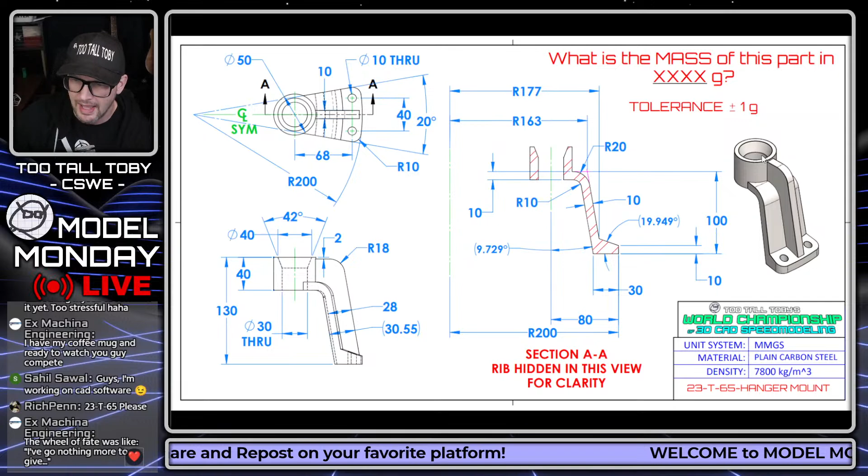I think I'm going to start out by doing - Rich Penn is saying do 65 please, the hanger mount. Sure yeah Rich, that's a great suggestion, I can definitely do the hanger mount. And I think I'm going to also do this one here, the puller body.

I thought this one was really interesting. It was a real neat moment watching the two runners. They both kind of got stuck with the same hang up on this model. So I'm definitely going to do this one.

Rich Penn is asking for 65. I can definitely do 65 as well. That's this one here, the hanger mount. So if you guys have any other ones you'd like to see, let me know and I'll try to model them up. But I think those are two excellent candidates, 65 and 71. Can definitely try to do those.

Brace plate is a good one to learn from. Yeah, you have to be clever with your reference geometry. Very nice insight there, Aaron.

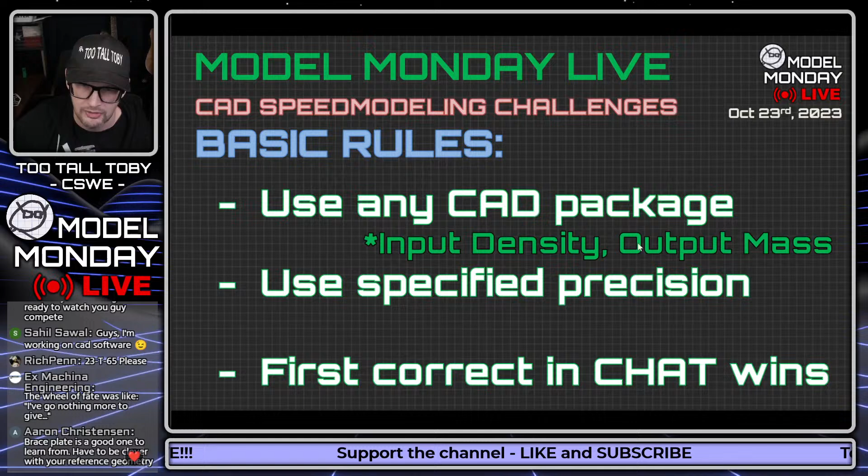Looks like it's off here. So we're going to go from 2D to 3D. I'm going to show you guys a 2D print. You're going to turn it into a 3D model, and you're going to enter the mass of that model in the YouTube chat. The basic rules are that you can use any CAD package. You want to make sure you use the specified precision, especially if the model is in pounds. It's usually in x.xx or x.xxx pounds. Make sure you use the correct precision. And the first one to answer correct in the chat will be declared the winner.

These are the units and materials that we use for Model Monday Live. So if you are here for the first time, make sure you take a screen capture of these units. Make sure you take a screen capture of these materials. That way you can create a library of materials that you can reference over and over again.

And the advanced rules are that this is meant to be fun and good-spirited. Occasionally I make mistakes, I leave dimensions off the print or other similar mistakes, maybe list it with the wrong material, and the Ivan exploit is permitted. So if I make a mistake, it's okay, we'll figure it out. And if you find a spot to use the Ivan exploit, then you go for it, and you can see if that can help you save some time on your run.

All right, that's it for the intro. Let's flip over to our full screen here. This first CAD challenge begins in 3, 2, 1, go.

What is the mass of this part in x.xx pounds? The tolerance is plus or minus 0.02 pounds, and this part is called hanger mount. We got another part called hanger mount, two different parts in the same live stream called hanger mount. That's unusual, but they have different drawing numbers, different part numbers, and that's what really matters. The other title is more of a description. All right, here we go.

What is the mass of this part in x.xx pounds? So if you are here for the first time, right now you should be taking a screen capture of this 2D print, putting it onto your second monitor, using something like Windows Snipping Tool or Snagit or whatever you like to use, so you can continue modeling this while we continue going through the live stream. So take a screen capture, maybe make YouTube full screen for a moment, grab a screen capture so you can see all these dimensions, and attempt to turn this into a 3D model and calculate the mass.

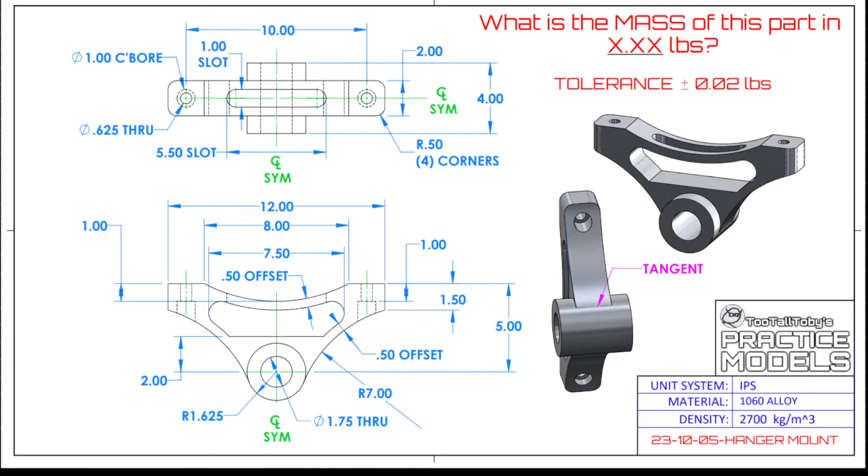Zakaroo asks, how do you enter mass properties in Onshape? Great question. The answer is you go into the material properties, and you can use a custom material. After you have a solid body, down in the lower left in the part studio, you can right-click on one of those parts and go into the material properties. You can say assign material, and then make that a custom material, or if you have access to a custom library, you can use those materials. I did post a video on this on the Onshape YouTube channel, so you can go back and watch that, and it links directly to my library that I built. It's one of the cool things about Onshape: once one person does it, the rest of the Onshape community can benefit from it.

Sahil in the chat asks, how do you build your own CAD software? It's a great question. Funny enough, I actually talked to somebody last week who's building their own CAD software, so it is possible. Ben K says, what's the Ivan method? New to the channel, but loves it so far.

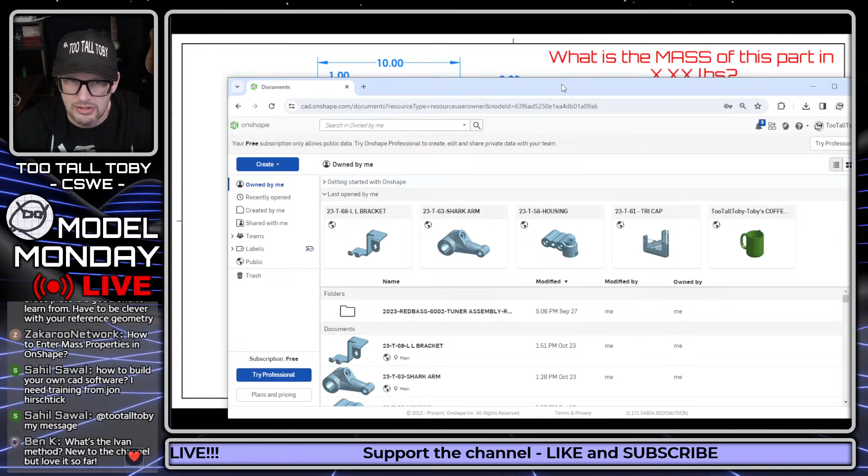Let's jump into a live demonstration here so we can answer both of these questions. I'm going to jump into Onshape. The Ivan exploit is named after Ivan, from when we first started doing the tournaments a few years back. The idea is that when you have two surfaces which are parallel to one another—let's say, for example, in this model here, let me open up this housing—

When you have two surfaces which are parallel to one another, like this surface here is parallel to this surface back here, the location of the holes in the middle on that surface doesn't really matter. So if for some reason it was beneficial for me to create these holes in a different location, I could leverage that to save some time on the model.

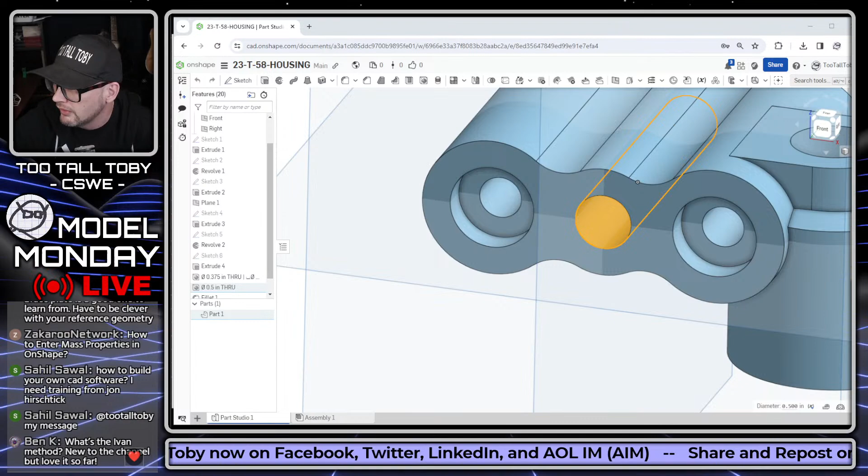There's actually an Ivan exploit NFT on the Too Tall Toby webpage, tootalltoby.com. When you create a free account on the Too Tall Toby webpage, you get TTT cash, and you can use that TTT cash to buy these NFTs from the general store. One of these NFTs here is called the Ivan exploit.

You can see here how Ivan used this to his advantage in that first tournament. The print called out these counterbores to be located as shown up above in the blueprint, and Ivan just dropped in four counterbores wherever he wanted, knowing it would remove the same amount of mass. From that moment forward, we referred to this trick as the Ivan exploit.

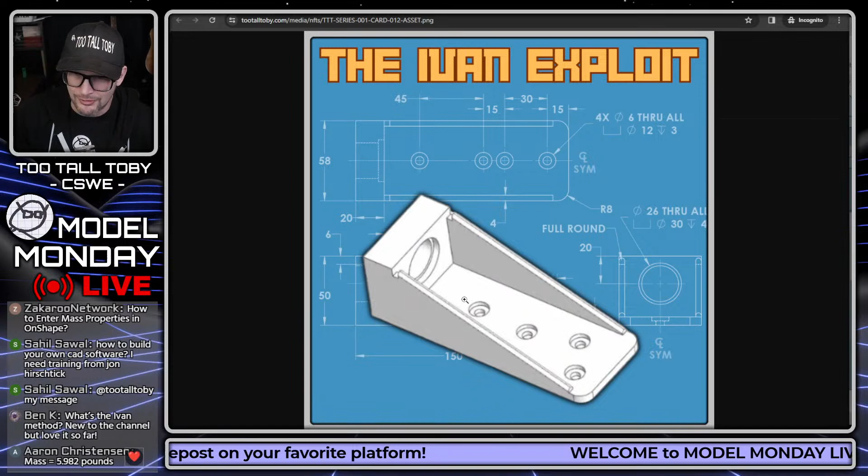As the tournament director, the person creating the print, I try to come up with ways of thwarting the Ivan exploit. For example, if that lower face had draft on it, Ivan wouldn't have been able to leverage that exploit. If the lower face was curved, he wouldn't be able to exploit that either. So that's the Ivan exploit.

We talk about that a lot in the channel—so much that it actually got its own NFT. There are 250 of these NFTs in the Too Tall Toby general store.

There's some other ones in here too, like the 2D printer. A lot of people like it and comment on it—it's just back here behind me, a little off camera right now. But I always see YouTubers with a 3D printer in the back, or multiple 3D printers, so I thought it'd be funny to show off that I had a 2D printer, which I use to actually print out some of these practice models.

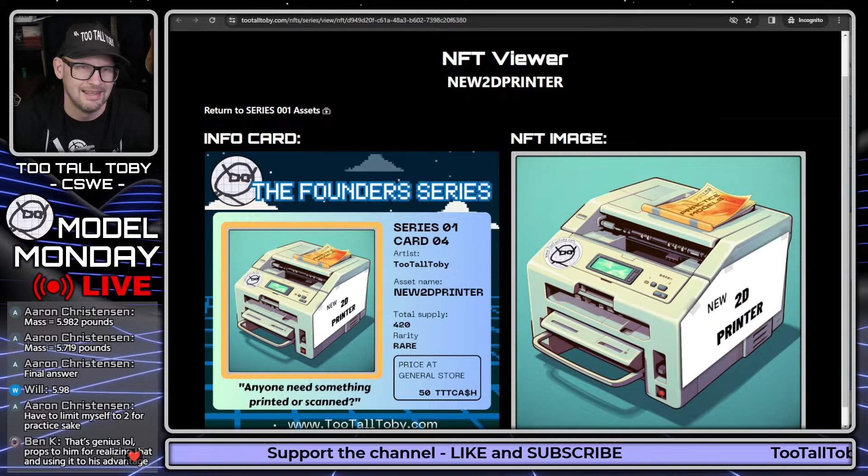Yep, that's genius. Props to Ivan for realizing it and using it to his advantage. Exactly, there's nothing I can do to stop it—if I'm asking you for the mass, I'm asking you for the mass.

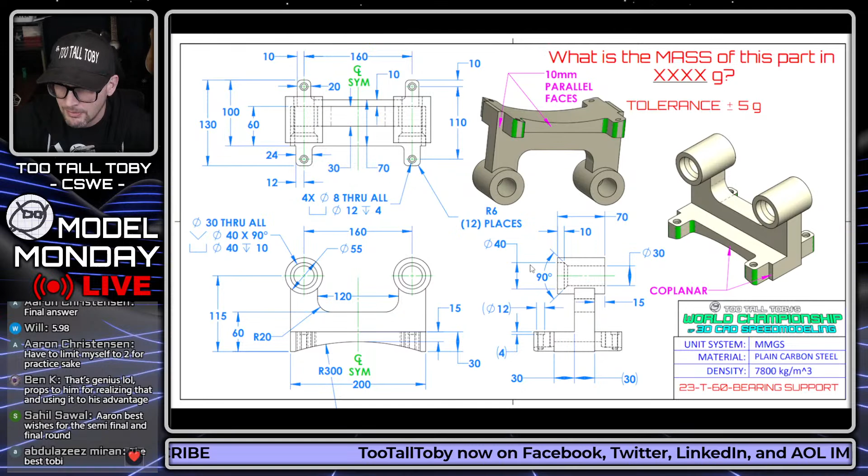There's not nothing I can do to stop it, but what I end up doing is just design these models carefully. This weekend you'll see some models have curvature along the bottom face, so you can't just locate counter bores wherever you want. You have to locate them at a pretty specific location, or else you'll be off and out of tolerance. That's kind of what I can do to try to thwart the Ivan exploit as the tournament director.

Sometimes that option just isn't there, and if you see those opportunities, you can use them. People have come up with some pretty clever ways of exploiting these models for that Ivan exploit.

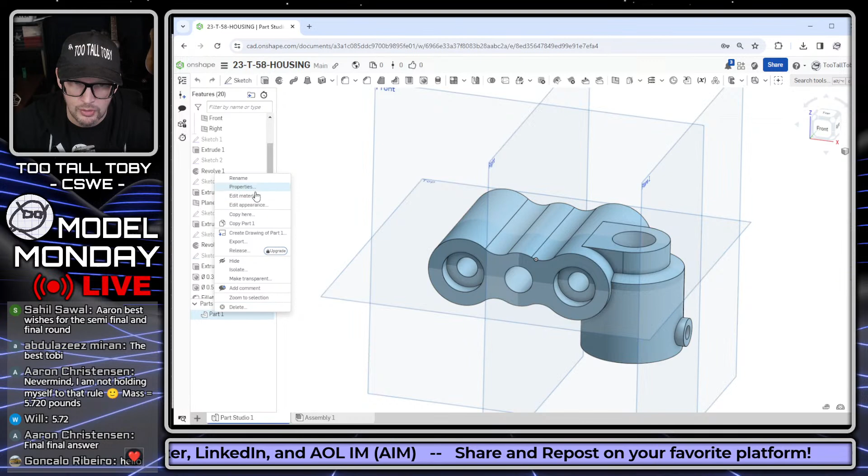To get back to your earlier question, Zach, when you're in Onshape, go down to the lower left area and right-click in the Part Studio, and that's where you can assign your material. Right-click, say edit material or assign material, and then you can either assign that material from a library, or go to custom and manually input a density for that model. That's going to be a much longer process, especially if you're working in inches and have to do the conversion.

So it's better to just configure and use the custom library. I use the custom Too Tall Toby library, with ABS, aluminum, or plain carbon steel. You can search for this library, TTT-custom materials, in the public space in Onshape, find that material library, and just add it to your library.

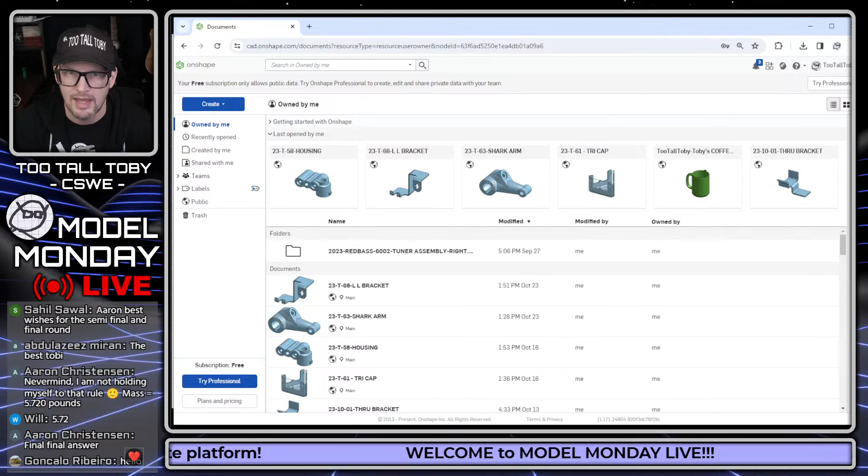Wow, and Aaron C is already in here with a final answer. That is impressive, he's already jumping in with a final answer. This guy did make it to the final four, so he's showing off why he's able to make it into that bracket where we end up having the prizes. What a series of competitions we've had in this thing.

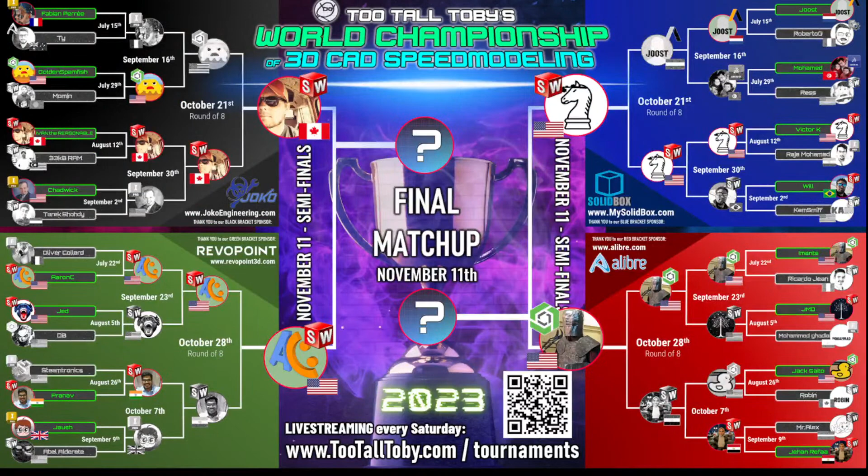We started out with 32 people in this tournament, and from those 32 we were able to whittle it down to just 4 final champions of their bracket: Ivan the Reasonable, champion of the black bracket; Victor K, champion of the blue bracket; Aaron C, champion of the green bracket; and Imants, champion of the red bracket.

Really cool, we got Sahil in the chat saying he thinks it's going to be Ivan versus Aaron in the semifinals, and then who knows who will be in the finals. It's gonna be crazy, screens are gonna be on fire watching these. Aaron says he's preparing to get obliterated by Ivan.

I don't know, it's anybody's game right now for sure. Any one of these 4 could end up making it into the championship. Really interesting, really exciting time right now. Very much looking forward to making our way to November 11th for the finals.

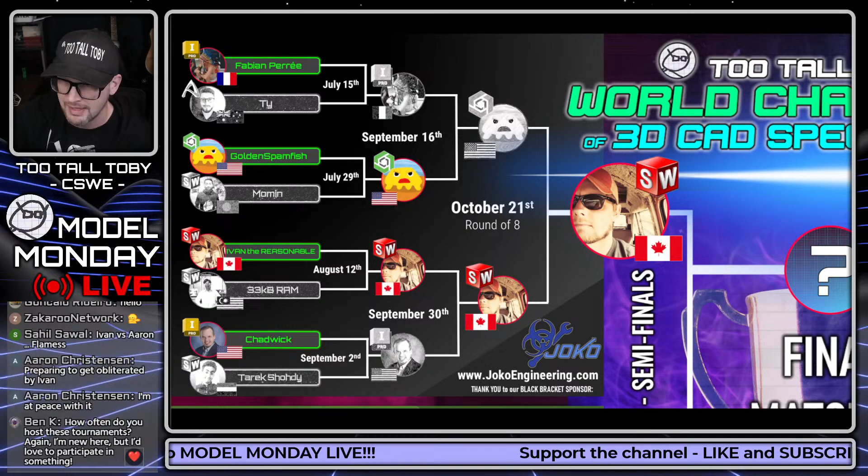They all had to battle through their brackets, and there was some really tough competition all throughout. Ivan going up against Chadwick was definitely tough, and then Ivan against the Golden Spamfish again. Really, you can say that all along these brackets - the Will versus Victor K matchups in the blue bracket were absolutely epic, and then the Victor K versus Joost matches from October 21st were pretty much a flawless run. I'm just about done editing those highlight videos, so you guys can watch those.

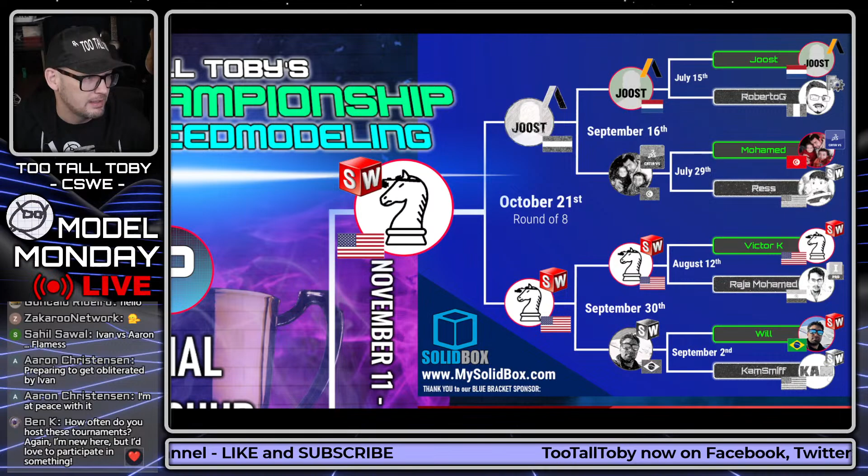Ben K in the chat asked how often we run these tournaments. Next year we're planning on running at least 2, possibly 3 tournaments. The first one will be the Spring Open tournament, starting in the middle of February, with registration beginning November 11th. We're going to open registration before we even get into this tournament, so when people log in they'll have the opportunity to register for the next tournament.

If you're just watching the tournament on November 11th, the registration will be open for the next tournament. That's going to be the Spring Open, which is going to take place starting right in the middle of February, maybe the 15th.

It's going to be shorter, 16 people instead of 32. It's not the World Championship. There's only one World Championship each year, although the first year we had 2. The World Championship will take place at the end of the year.

So it's going to run shorter, 16 people, running about 7 weeks total duration. It'll be another great tournament with lots of great competition, and we're going to have registration open for a long time, so people have plenty of opportunity to improve their scores over time. I think that's going to lead to a more exciting tournament as well.

So yeah, gotta get stoked, gotta get started touching up my skills. Awesome, Ben. Well, good luck.

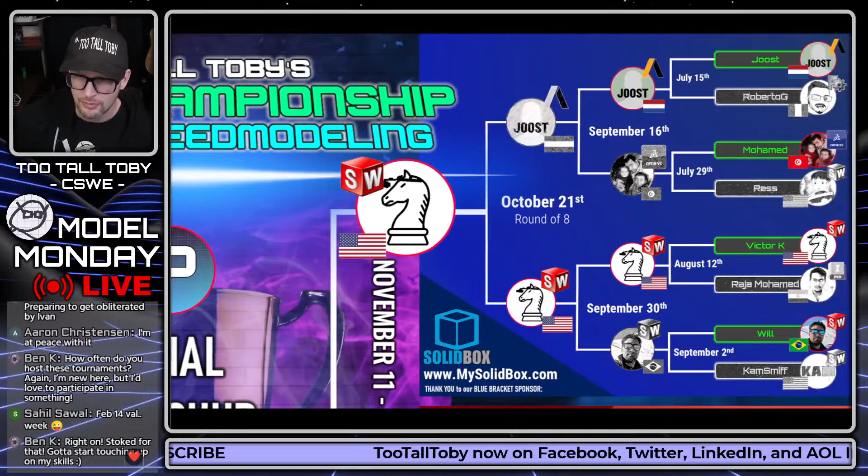Great reminder there. So yeah, all these matches were awesome, they were all absolutely epic. Imants coming through with Onshape, kind of the last standing non-SolidWorks user here in the tournament.

Pretty exciting, same configuration we had last year. Last year we had 3 finalists running SolidWorks and 1 finalist running Onshape, and this year we're seeing the same thing, very similar to last year. In fact, I think Ivan and Victor were both in the final 4 last year.

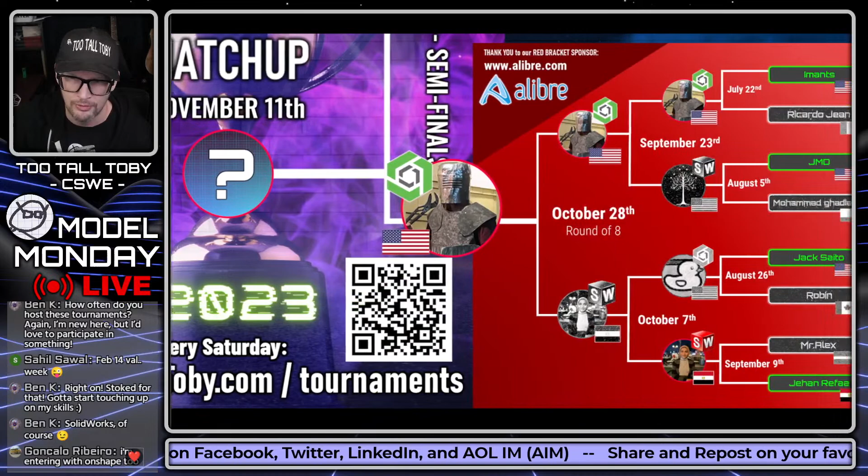So our champions of the blue bracket and of the black bracket have been here before. Our runners from the red bracket and from the green bracket are kind of new to this position. We'll see if that experience helps them maybe stay a little calmer.

Ben K saying he's using SolidWorks. Very nice, awesome.

The McBobbles in the chat says, I caught a mistake, can I change my answer? Absolutely, McBobbles. Here on Model Monday Live, you can revise your answer as many times as you like. I basically just accept the very last answer that you put in. So absolutely, go ahead and revise your answer as much as you want, and we'll see if you can submit a correct answer. Yep, nice, very nice, and feel free to keep doing that.

Now in the tournament, it's a little bit different. For Ben K, who's here for the first time, and if anybody else is here for the first time, in the tournament the way it works is you can answer incorrectly one time, and then if you answer incorrectly a second time, that's it. You can no longer earn the point, and it's up to your opponent to figure it out in 5 minutes. If they can't figure it out either, it's just a push. So the tournament is a little bit different, and if you want to see some good examples of that, you can go back and watch the matches from this weekend. We saw some good examples of how that mechanism works. But in Model Monday Live, you can answer as many times as you like.

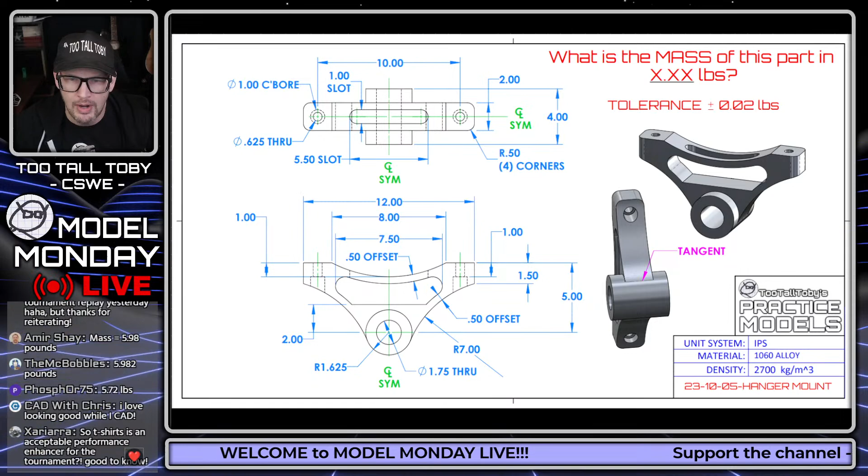Well, as always, what I would do is look to see if the model has symmetry, and it does, in 2 directions. So that's going to help me come up with a location of the origin, probably here. And then I would look for any kind of anchoring dimensions, dimensions that all seem to be coming from the same spot. I'd say this baseline right here would be a good candidate for that, there's a lot of dimensions that seem to be coming from this baseline. So I would probably put the origin right here centered on the model, and then I would create my first sketch.

I think my first sketch I would be laying out this geometry, probably only creating half of the geometry. And honestly, I probably would leave this little radius here at the bottom off in my first sketch, just because I really prefer to keep my sketches simple. But certainly you could make your sketches more complicated if you wanted to, you could just sketch everything pretty much here in the first sketch, including this arc here.

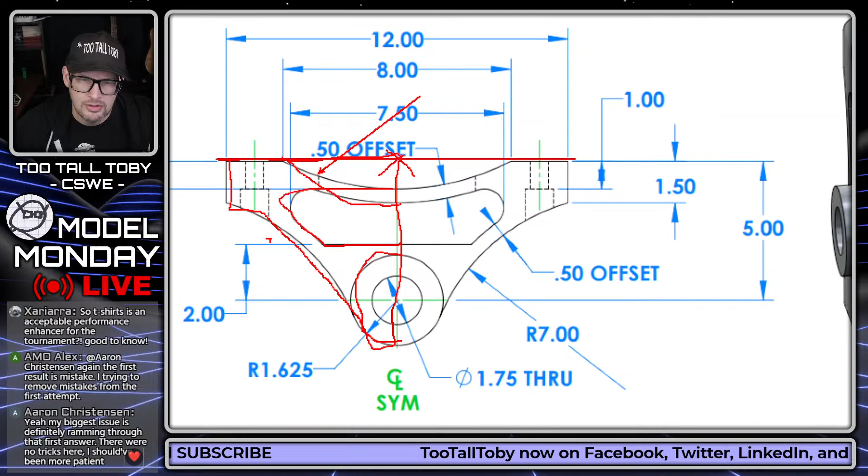And then you could start extruding those to your different depths, one extrusion out to this depth, a different extrusion out to this depth, and then you'd be ready to start going through adding your cuts. Probably I would do this counterbore with a cut revolve from the front or over on this side, and then I would mirror the whole thing, and then I would be done. I would calculate the mass and submit my answer. So let's see, hopefully that's pretty similar to what you guys came up with as far as a process for this, and let's see what everybody came up with.

Oh, we got a question about the shirts. So, t-shirts is an acceptable performance enhancer for the tournament. Good to know, yeah, that's a great question, from Xariarra. And yes, that is correct, there are some things that are acceptable. Also, I would say Waterloo sparkling water.

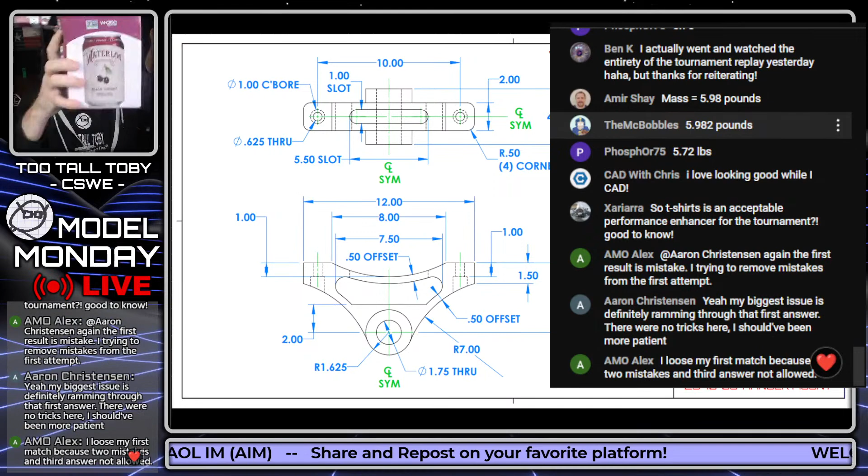I don't have any, I finished my case because I was getting ready for this live stream today. But Waterloo sparkling water is also an acceptable performance enhancement for the tournament. Great question, glad we got that officially resolved.

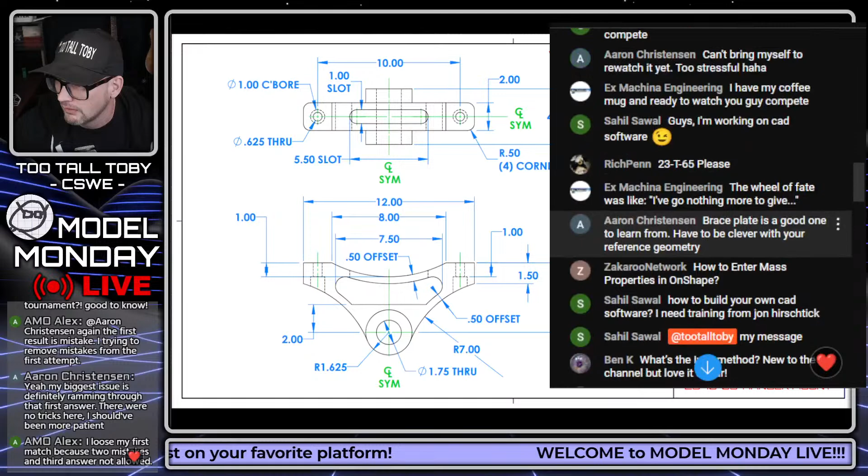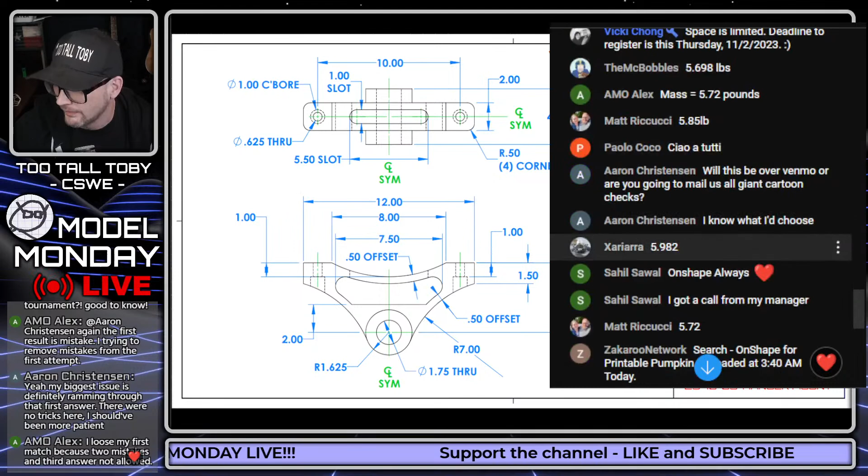Let's take a look and see what kind of answers came in. First answer came in from... Aaron C, 5.982, revised to 5.719, so I'll round that to 5.72. Will came in at 5.98, then revised to 5.72. Seeing some consistency here - a lot of times we see this answer convergence over time as we watch Model Monday Live. The McBobbles, 5.70. AMO Alex, 5.72. Matt Ricciucci, 5.85 pounds. Xariarra, 5.98 pounds, then revised to 5.72 - same convergence. The McBobble, 6.01. Xariarra, 5.72, looks like a little revision there.

Phosphor coming in using plasticity, 5.75. Amir coming in at 5.98. The McBobbles, 5.98. Phosphor coming in at 5.98 as well - seeing a lot of convergence on that number too. And then 5.72.

Let's see here, we're gonna try to remove this one if we can. I've got that little heart there that's in the way, that's not what I want. I'll ask my moderator, I'm sure she can probably remove that.

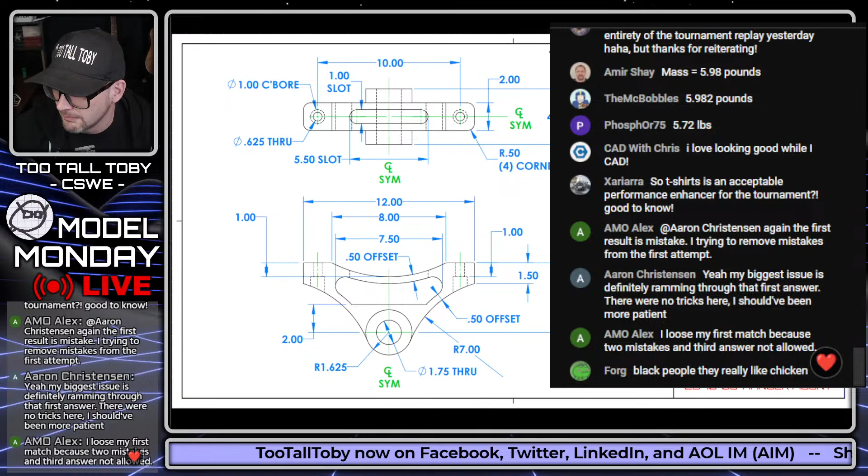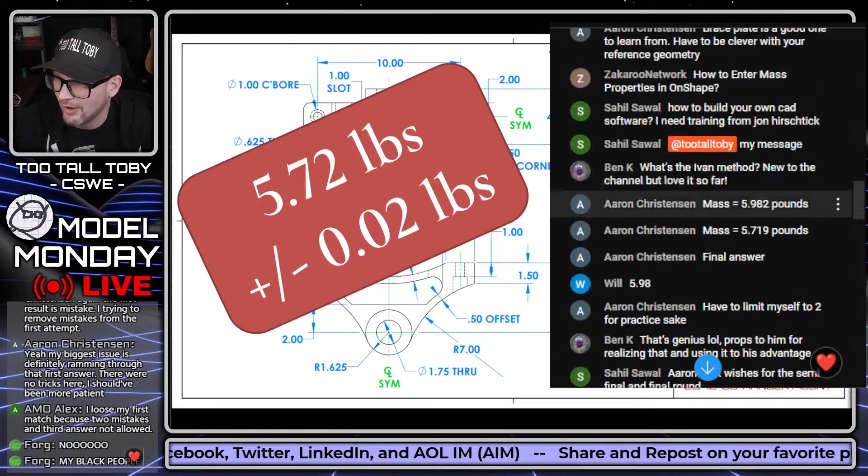Let's take a look and see what we got. The correct answer here is 5.72, very nice. So if we go back up, we see our first person answering this correctly was Aaron C, coming in at 5.72 pounds. Congratulations to Aaron C! This is plus or minus 0.02 pounds, so I saw a lot of people answering like 5.70 - if you were within that tolerance, very nicely done. But GG to Aaron C, who is going to get the point for today. Let's put a GG in the chat for Aaron C.

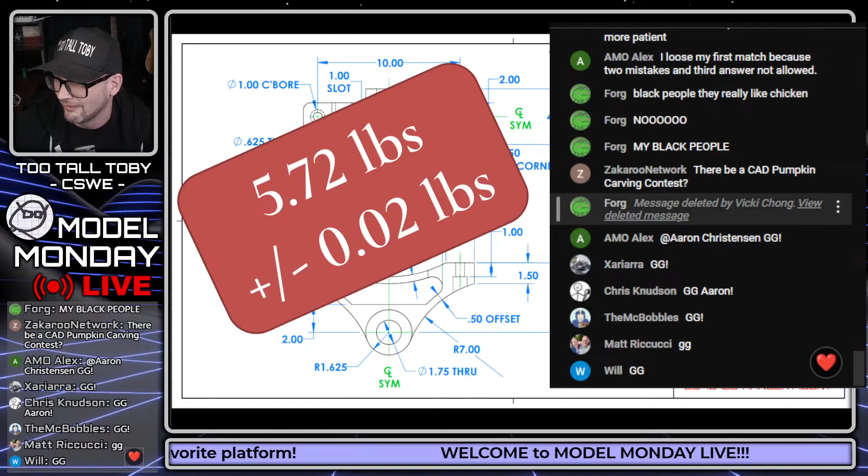That is going to allow us to move on to the next model. As we get into this next model, we're once again going to challenge you to take a screen capture. I'm going to flip over to full screen, and once we do, we'll kick off this challenge live in 3, 2, 1, go.

What is the mass of this part in grams? The tolerance for this part is plus or minus 1 gram. Looks like this part is going to be in plain carbon steel, and the model is called 23-10-06 shifter.

This is one that I was a little bit worried about, making sure I didn't make any mistakes. It's one of these models where it's really easy to forget that it kind of naturally looks symmetric in the front view, top to bottom, but it's not actually centerline symmetric. A lot of times when I'm constructing these models I forget about that and accidentally put in the wrong stuff. So this is my 23-10-06 shifter. Good luck to everybody, good luck, good luck. I'm going to take a sip of my coffee.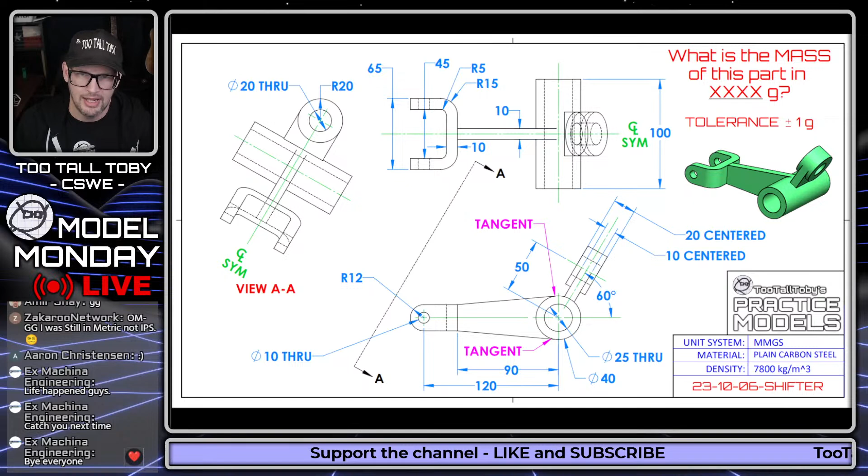It also kind of depends on how the models are being used, how the parts themselves are being used and manufactured. So good luck to everybody on this one. This is kind of a fun one.

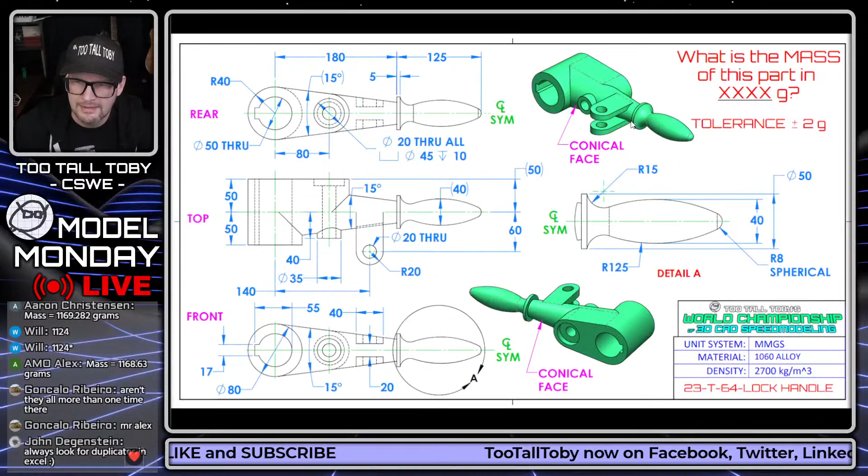All right guys, let's do a little bit of Onshape modeling here. I think this one will be pretty fun to take a look at. Just like what you're doing in the live stream, I'm going to start by grabbing a screen capture of this print. And then what I always advise my students to do is try to come up with a game plan. Before you get started in 3D CAD, it's always good to come up with a basic game plan. That game plan could be something as simple as, okay, I'm just going to draw a circle and extrude it. But a lot of times it requires a little bit more planning.

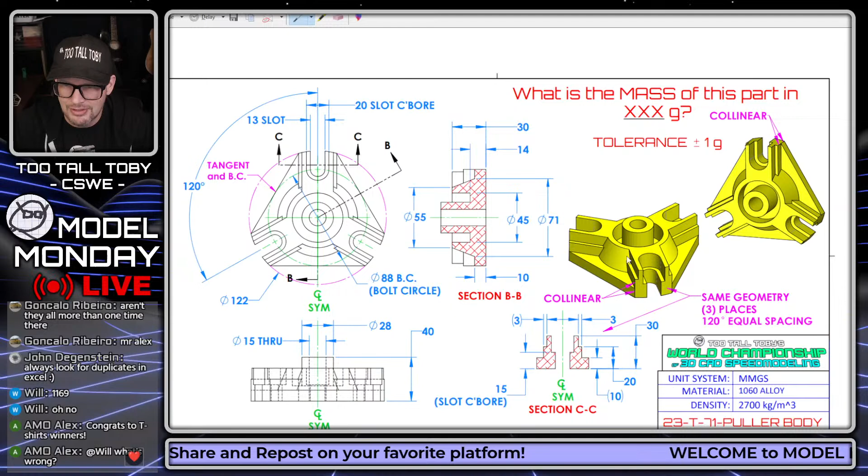Now what was so interesting about this model was that both of our runners got stuck with regards to this geometry here, this geometry sticking out from the front, which you can see detailed in this section view CC. This is a really fun model to try. If you haven't tried this one yet and you don't want to see the solution, you can pause this live stream and try it yourself before watching the solution here. But the thing that was interesting about this model, watching our runners on Saturday, is that they both got stuck with regards to this section here.

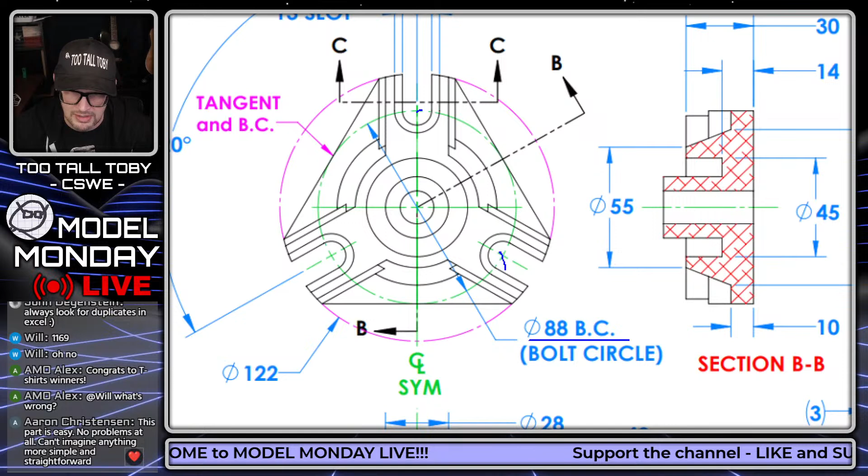Really the problem, or the challenge, with this section is that this dimension here, the width, is not called out. So whatever the width is between these two legs of this boss sticking out here, that width is not being called out in the print anywhere, or so it seems. The reality is that the width is being defined by where this magenta circle over here is cutting through the model. So what you really need to do is first come up with this green circle on the inside, which has a diameter of 88, bolt circle, 88 BC. That's the diameter to these locations here, but it's also the diameter here to tangency.

Once you get that 88 diameter in place and you get your tangency for your triangle, you could really just draw that as a triangle. Then you can create this magenta colored circle and lop off the end of that triangle, and that's going to give you the width of that section CC that's sticking out. So it sounds very easy, and certainly when you plan it out, especially if you made the model yourself, it's very easy to plan it out. But when you're there under the gun trying to model this thing on the fly with the whole world watching you, it's not nearly as easy.

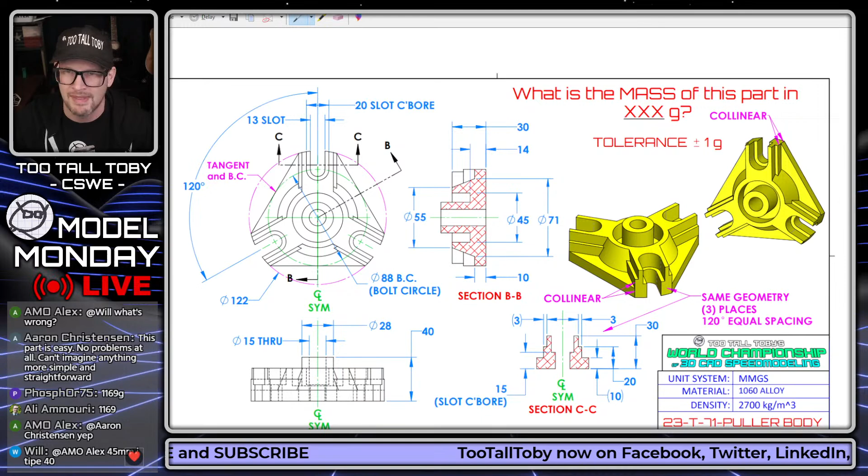And so that's what we got to see both of our runners doing. It was just really interesting to see them model it, interesting to watch them both in real time get kind of tripped up by the idea of feature order creation. So here's what it might look like if you were going to go through this again, if you were going to go through it a second time.

So I'm going to call this 23-T-71-puller body. That means that if you've got Onshape, you can search for this model in the public space, and then you can actually take a look and see how I built it.

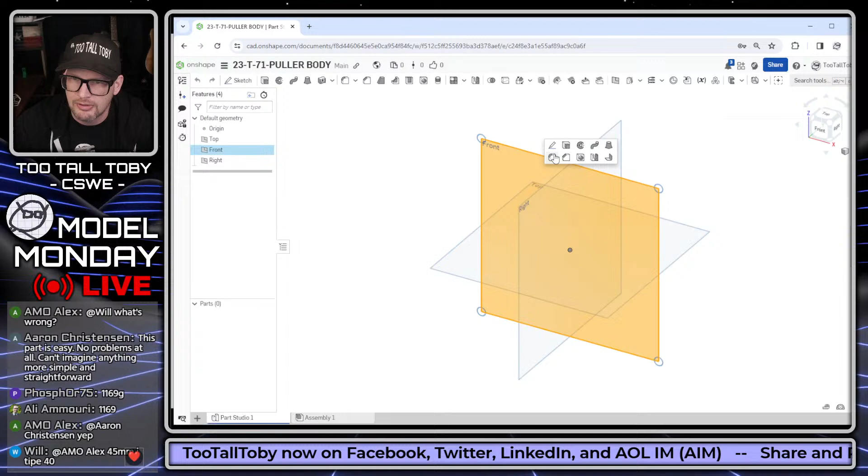I'm going to start out by going to the front plane, and I'm going to start out by creating essentially what's shown here in this section view - this shape that comes down, over, up, over, down at an angle, and then straight down. I'm going to create that shape, but only half of it, and then revolve it about the center line.

So we're here on the front plane. We're going to get normal to. I'm going to start out by just creating a center line. The reason I like to create a center line here is because then I can utilize doubled dimensions in Onshape.

And then I'm going to create that shape that I just kind of hand sketched up a moment ago. So it comes over, down, over, up, over, down at an angle, and then straight down to kind of close that off. And now that I've got that shape in place, I'm ready to go in and start adding my dimensions.

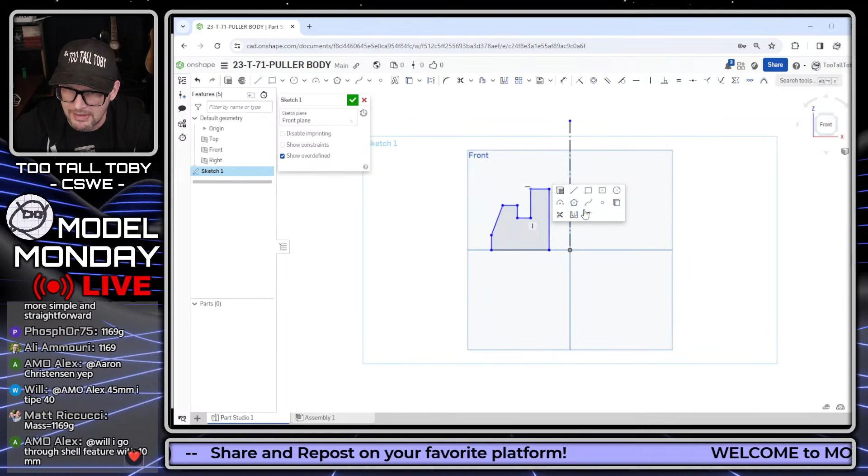So because we have the center line, we can utilize doubled dimensions. This is a 15 millimeter diameter through hole. The total height here is going to be a height of 40. The height to this flat spot here is going to be a height of 10.

The height to this upper section here is going to be a height of 30. The height to this inner step here is going to be a height of 14. The diameter dimension here to that kind of inner hub section that's sticking out is 28.

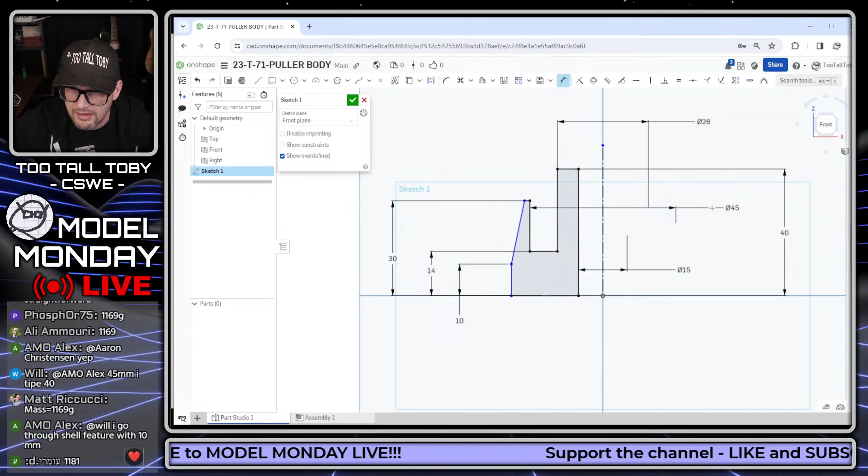The diameter to this kind of inner sleeve section is a diameter of 45. The diameter to this peak here, this corner point of that geometry, is 55. And then the diameter to the lower part of that tapered section of the boss is 71.

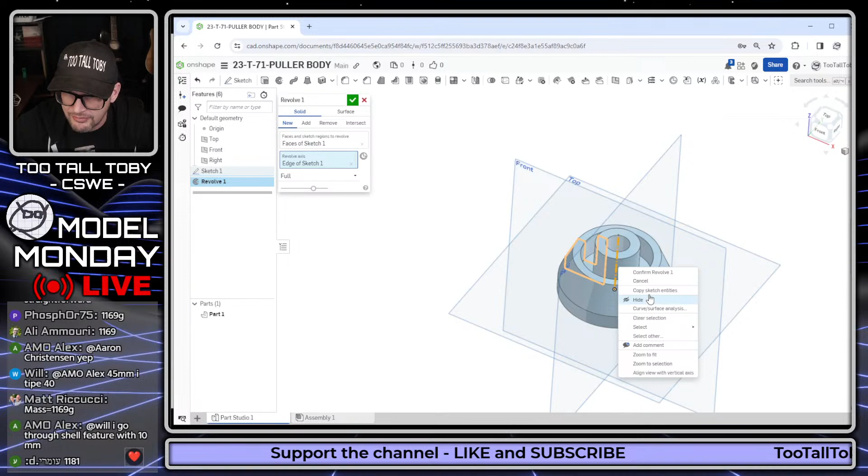And so now that we've got that geometry in place, we can choose this center axis to revolve about. And that gives us our kind of center hub region of the model.

So I didn't mention this before - I kind of skipped over it because I'm a little concerned about time. But whenever you're trying to create a 3D model, you want to come up with a game plan for how the overall model is going to be created. In the case of this model, my game plan is to create this shape shown in the section view, then create the triangle shape, then lop off the corners of that triangle shape, and then finish up by creating this boss here that's sticking out on the end.

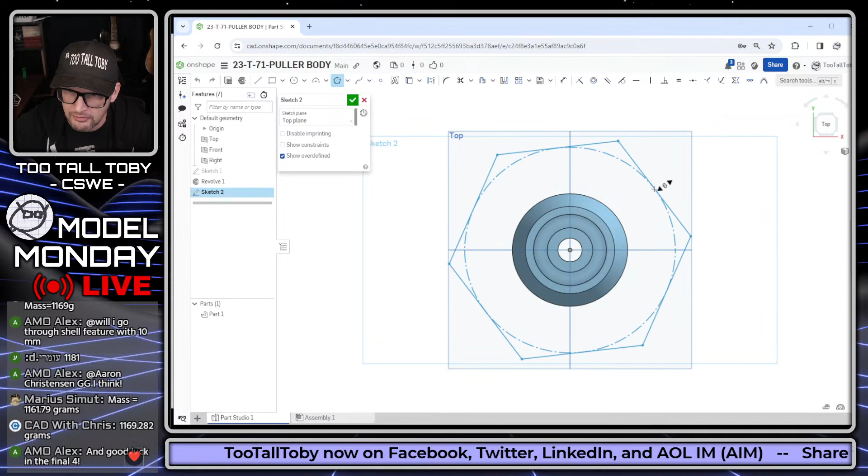So that's my game plan - there's part one of it. Now I can go to the top plane, begin a sketch, orient my view, and create my triangle. I'm going to create it right from the center location here in Onshape, and that's going to have 3 sides. And then that triangle is going to have a diameter to tangency of that.

That's the 88 dimension I mentioned earlier. I'm going to take this line here and make it horizontal, and then I'm just going to extrude that shape up to a height of... what's that going to go up to? I guess I could actually just include that other circle right in that original sketch.

So let's go back into that sketch. We'll just double click on that sketch there and get normal to. And then I'll include that other circle as well in that same sketch. That circle has a diameter of 122. And that should be constrained. There we go. And there we go.

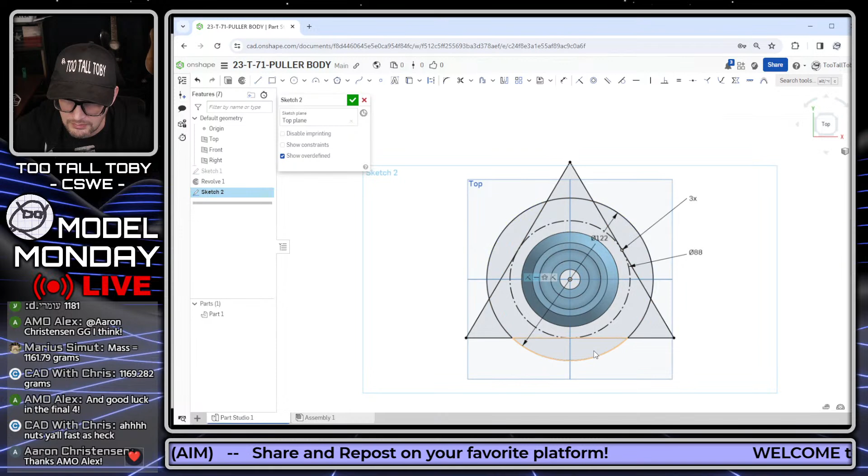That gives me I think a better shape to extrude. So now I'm going to extrude that shape, and it's not going to be the whole thing. It's going to be this kind of inner region like so, and that's going to come up to a height of 10 millimeters. And there we go. That gives us that shape - that is what we wanted from that geometry.

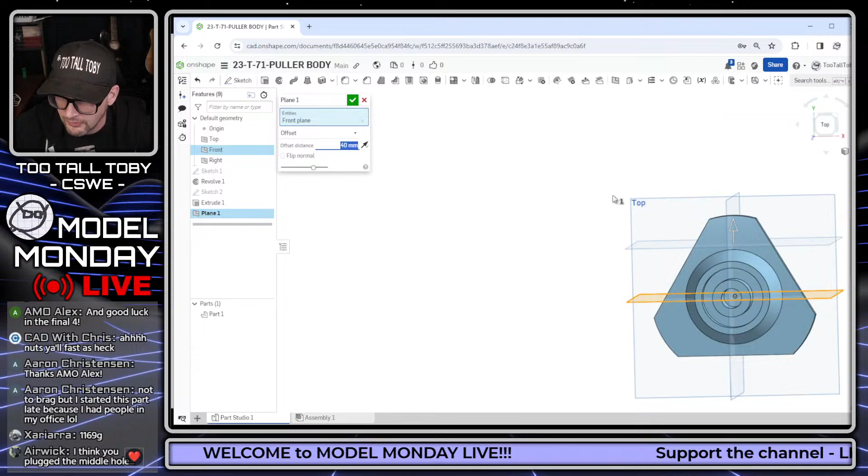And that also gives us this width here, which was the kind of missing dimension, the missing trick that needed to be established before our runners were going to be successful in their run. And so now from here, I can take this plane and offset it some arbitrary distance. You don't have to do this. I know that Aaron C is very good about just kind of working from the centered plane and then creating the geometry from that center plane using an offset when creating the geometry.

But me personally, I prefer to just give myself explicit geometry to work from. I just think it helps me visualize what's going on.

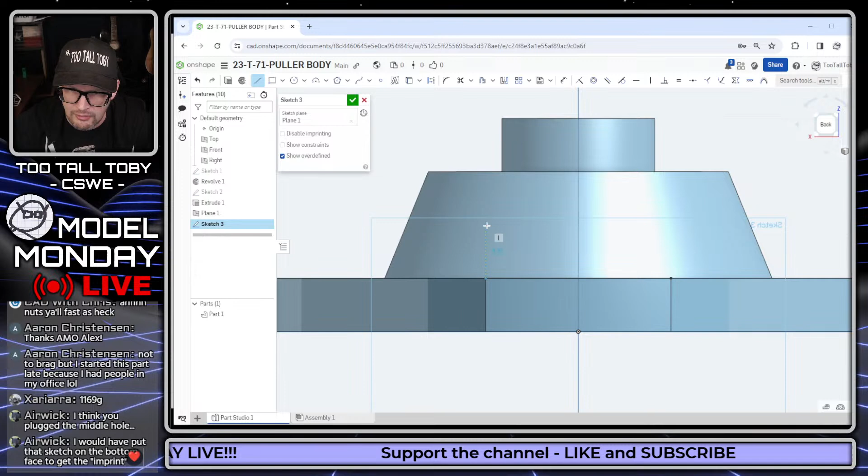So now I could take this edge here, which gives me the width I'm looking for, and then create a line that comes up, over here, comes up, over here - really this could just come all the way over - a line that comes down, over here, and then down to this location. Then it's just a matter of taking these two lines and making them collinear, and then taking a dimension for height here to this line.

And that height dimension is 20 millimeters off the ground. It's 10 millimeters from that upper deck. And then this and this are going to be collinear.

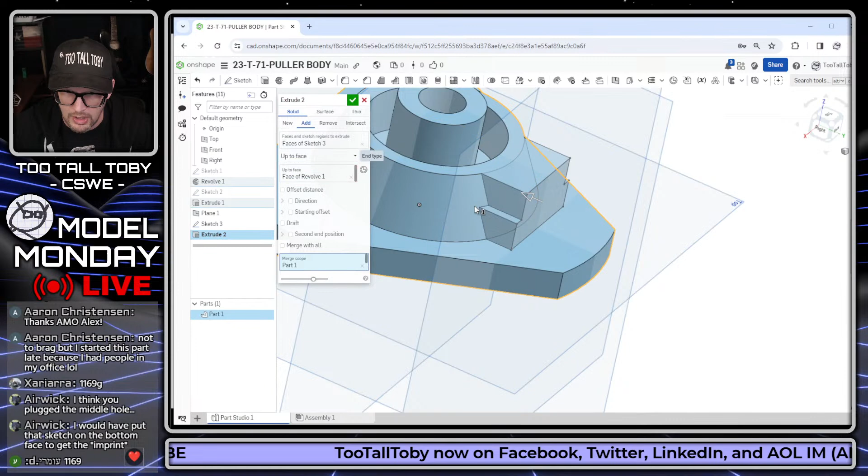And now what I can do is an extrusion, and that extrusion can go up to surface. So I can go up to face in direction 1, and then I could also go up to face in direction 2. So that's my trick for creating this geometry - dropping a plane in the middle there and then sketching that geometry.

This was something really interesting. Aaron kind of designed himself into a corner when he was creating this model on Saturday, and he really struggled with how to create the blend between this shape and this shape. He was getting in there using delete face and some other commands. And again, that's not a criticism on Aaron - I totally understand that when you're in the heat of the moment trying to create this geometry, it is not easy to come up with an elegant solution.

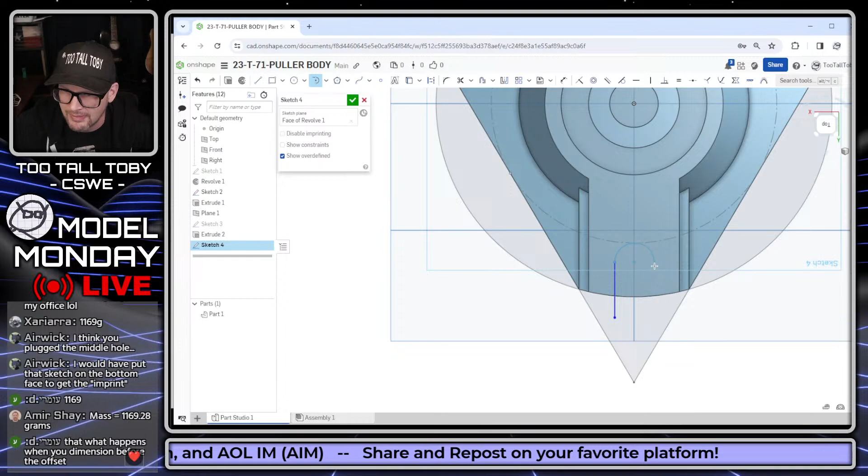But I totally get where he was coming from. It's just something to think about next time around - maybe just using an explicit plane there, and even thinking about the different directions in which an extrude can occur, is really the lesson there.

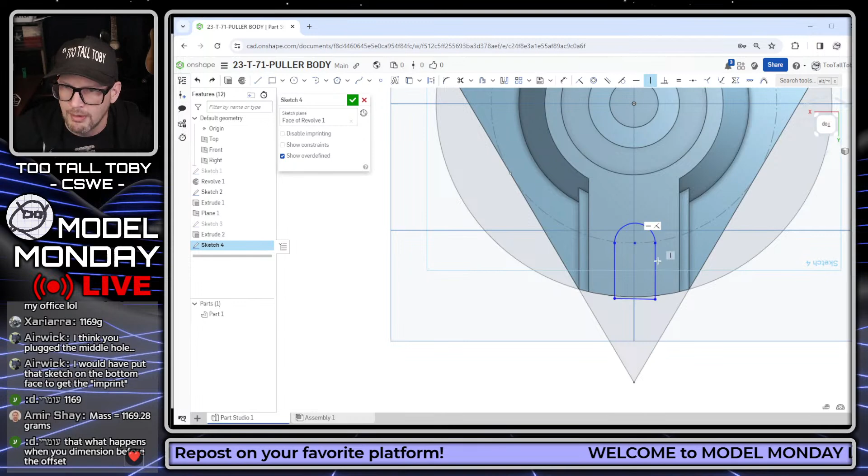There's going to be a few different ways in which you could do an extrude - from the top looking down, or from the end looking in, like what I did there. It might be better sometimes to just experiment with those different ways of doing the extrude.

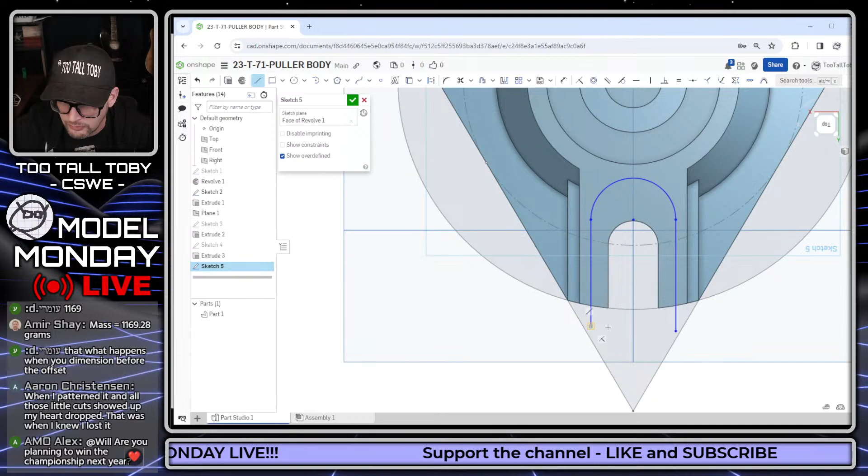There's a few different ways you can make a slot in Onshape. You could draw a line and then do essentially an offset to create a slot, or you could do this line-arc-line method that I'm using here. Both of those methods are valid, so you can experiment and see which gives you the fastest result. But I think this method works good for me.

So we'll take these two entities here and just make them concentric. And then we are going to create our slot width here of 20.

And then we can take that and remove it, down to a height of... oh good, I made it from the bottom. Well, they're both 15, right? It's 15 cut in half. And there we go - that gives us our fundamental shape there.

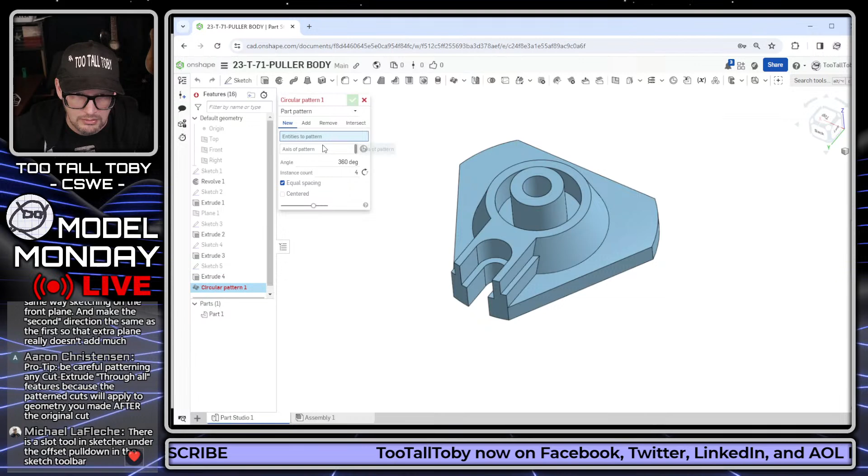And now it's just a matter of going into a circular pattern. We're going to say that we're going to pattern this - this is going to be a feature pattern. Actually, with Onshape, the cool thing is that a lot of times you can just take the whole part and pattern it if...

Sometimes you can do it. Let's see what happens - is that going to work? Nope, it's not going to work, because we're removing material. I forgot we were doing that remove there.

So let's do a circular pattern here, and let's say this is going to be features to pattern. Those features are going to be this extrude and this extrude and this extrude - yep, those three. And then we'll pattern it about this, at 3 instances.

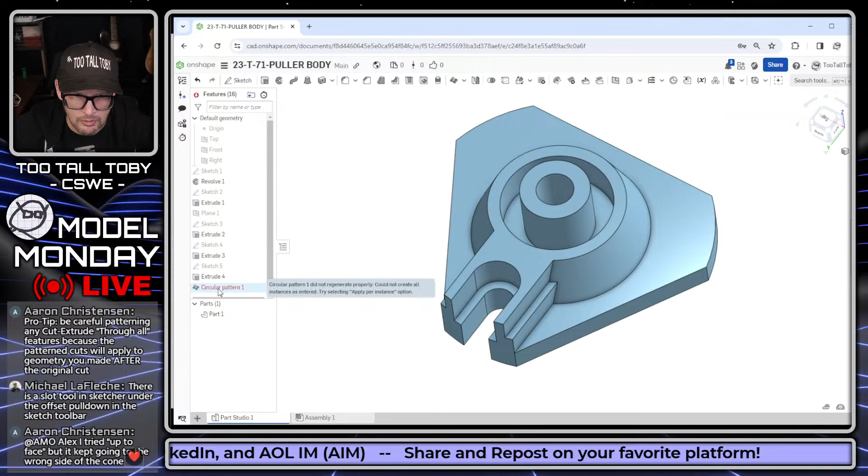And see, when Onshape shows you that result in red, that means it's erroring for some reason. So I wonder how I could resolve this quickly. Let's see, we are kind of running down on time here. Let me go back to the part pattern - it should work, right?

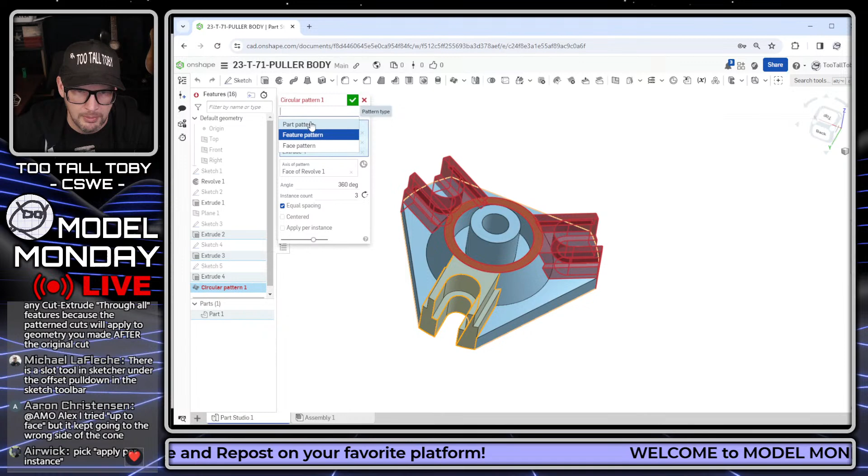Sometimes what I'll do in this spot, if I'm under the gun for time, whether that's in a speed modeling or in the real world, is I'll just create some geometry to cut the model with. There's a few different ways we could do this, but this is what I know works.

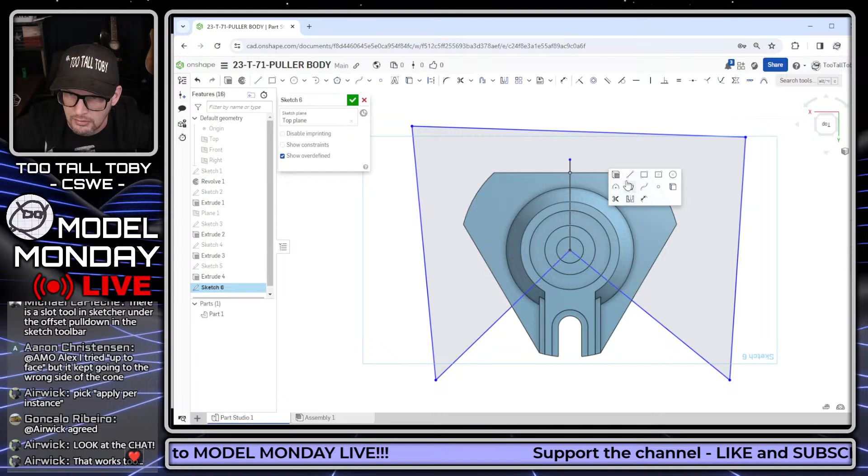Then I'll say I want this to be 60 off of a vertical, so we'll create a vertical here. I want this to be 60 off vertical in this direction and 60 off vertical in this direction. So I'm taking 360 divided by 3 divided by 2, so 60, which gives us that 120 dimension.

And then you could do a remove through all. So we'll do a remove here and go through all, and let's reverse the direction on that. And that cuts that model.

Once you have that model cut, then you could do your circular pattern using the entire part to pattern. We're going to pattern it about this axis here, and that's going to get patterned to 3 instances, and we're going to do that as an add so that it merges them together.

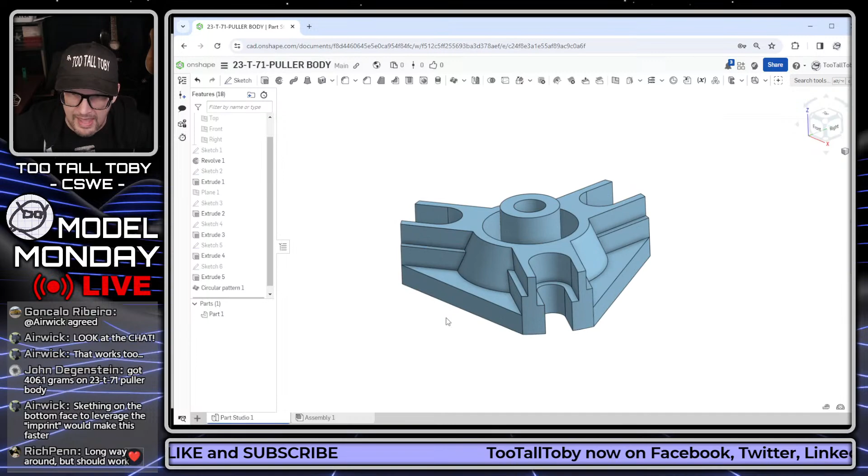And there we go. So that's a little trick workaround you can use if you're ever stuck in a model, whether you're working with Onshape or SolidWorks. I've used that in both spots.

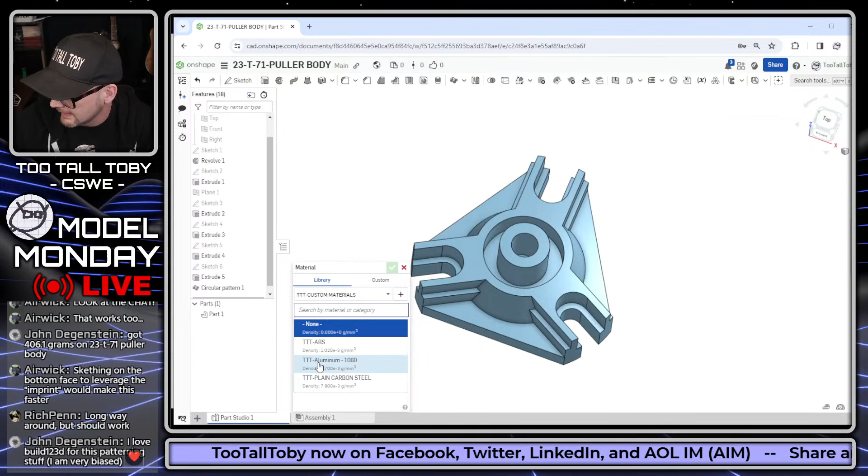When you try to do a pattern and it doesn't work, you could just chop the model and then do a body pattern, because a body pattern is basically a Boolean copy, so it doesn't care about end conditions. Usually when those patterns fail, it's because of some type of an end condition issue.

Whoops, looks like maybe when I did one of my cuts, I didn't include this face here, so I'm going to pick that face and do an extrude. Something kind of cool about Onshape is you can do an extrude right from a face - you don't have to create a sketch first.

So there we go, and now we do mass properties, and this comes up with 406 grams. I think that's correct - let me look at my top secret answer key here. Yep, 406 grams, and that is correct. That is the correct answer we were looking for.

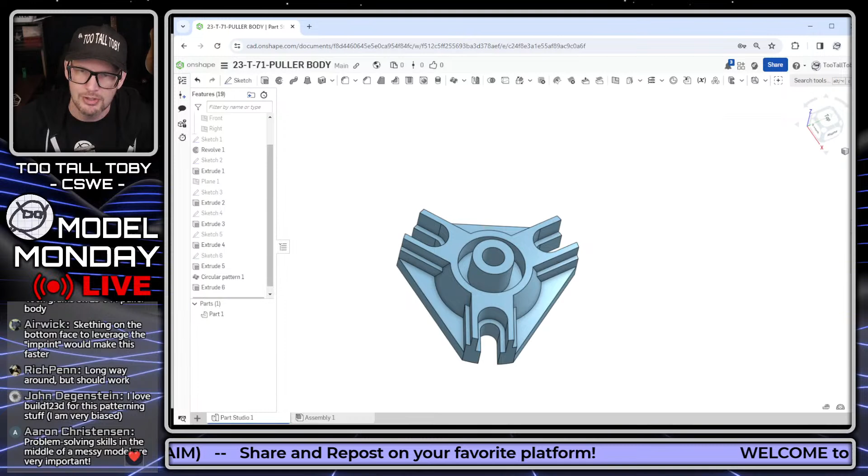Aaron Christensen saying problem-solving skills in the middle of a messy model are important. Yes, indeed. Airwick, I'm sure you're screaming at the monitor as well, like, oh no.

Oh, pick apply per instance. Oh yeah, right, that's like the geometry pattern. Airwick is in the chat saying pick apply per instance - that's like the geometry pattern in Onshape. I actually recently made a video about that. It hasn't been released yet, but I made an Onshape quick tip about apply per instance, so I should have known to try that. That's a great point, I'm gonna definitely try that as soon as the stream ends.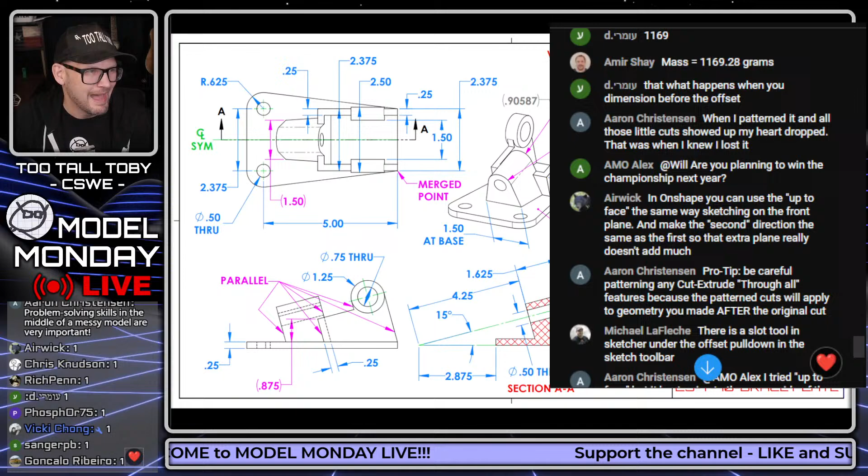Very, very cool, very cool to know about. Thank you for that insight. Airwick is the resident Onshape master and definitely has been my mentor, providing a lot of great responses to videos. And Michael LaFleche is here as well.

Yeah, nice, yeah, the slot tool - we could definitely be using the slot tool in there as well. I've talked about that as well, another video I made too. Making videos and forgetting to use them when I'm under pressure - I'm sure a lot of you out there who have done the speed runs can appreciate that.

All right guys, well let's take a look here as we're winding out the hour, and let's see who's going to get this second point today in Model Monday Live. So it looks like the first answer came in from Will 1139, Aaron C 1169, Will 1124, and then AMO Alex 1169. Very nice.

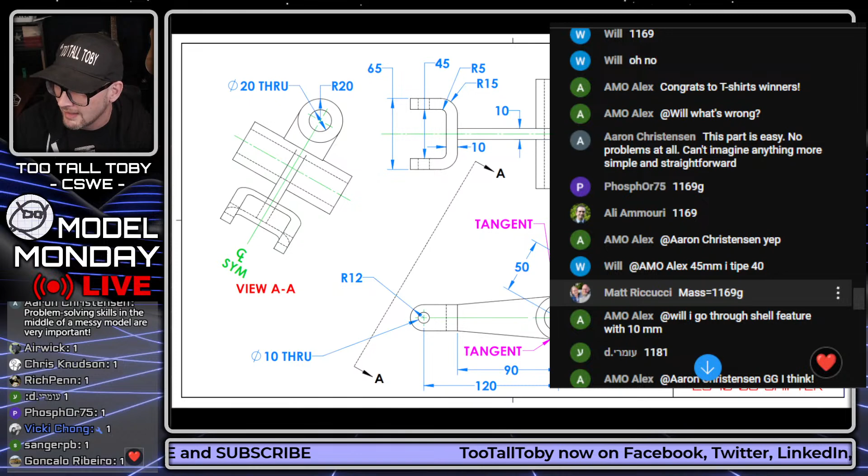Will 1169. Very nice. Phosphor 1169, Ali Ammouri 1169, Matt Riccucci 1169. Omri coming in 1181. Marius Sumit coming in 1161. Or 1162. CAD with Chris 1169.

Very, very nice. Oh, nuts. Y'all are fast as heck. Yes, indeed. Let's see here.

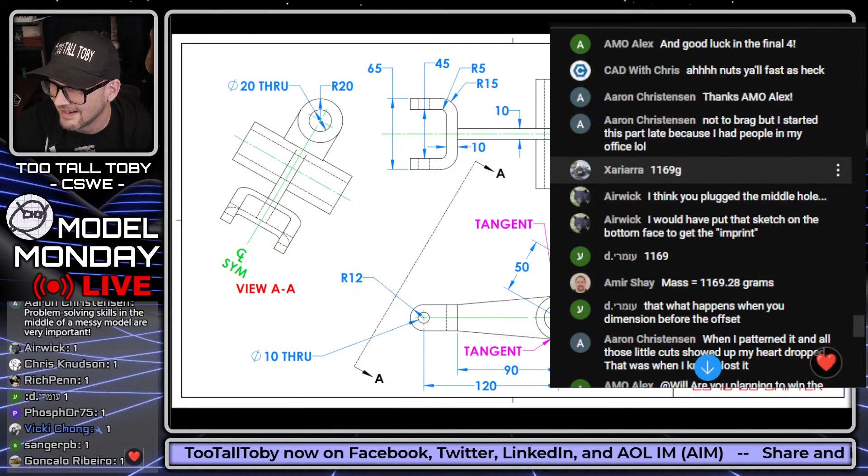Xariarra, Aaron Christensen doing a little flex there in the chat. Xariarra 1169. Nice. Omri revising to 1169. Amir Shay coming in 1169.

Very nice. Let's see here. And all right. Very nice. Eric saying, look at the chat. Yep, I knew you were screaming at the monitor. Apply for instance. Yep, excellent.

Jern coming in with the pulley body at 406 grams, a little bit different from what I was getting, 416. Long way around, but it should work. Sketching on the bottom face, leveraging the imprint would make it faster. That's a great idea, I've got to start using that more for sure.

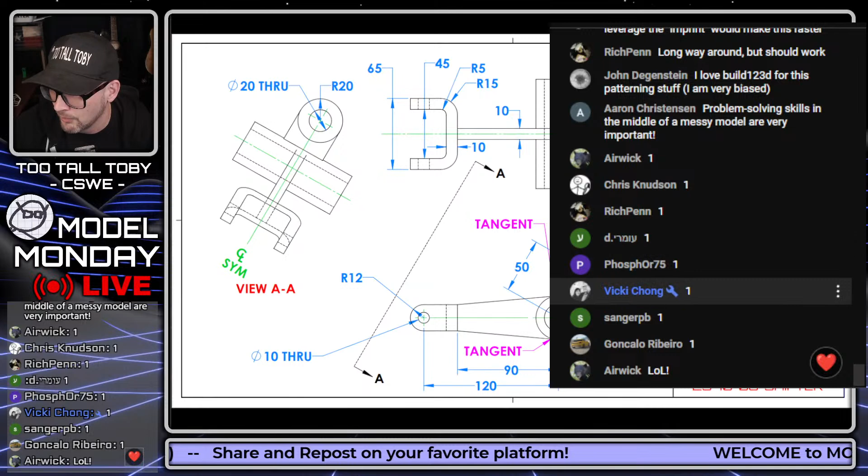Okay, all right, awesome, guys. So let's see if Aaron is going to do a clean sweep today.

The correct answer is 1169. Very nice. So Aaron gets the clean sweep. He gets the point for the first model, the point for the second model, and he gets a bonus point for getting them both, so 3 points for Aaron today. Everybody else who got the correct answer also gets a point today. We're giving out points just like we're giving out t-shirts today. So congratulations to everybody who got that one correct.

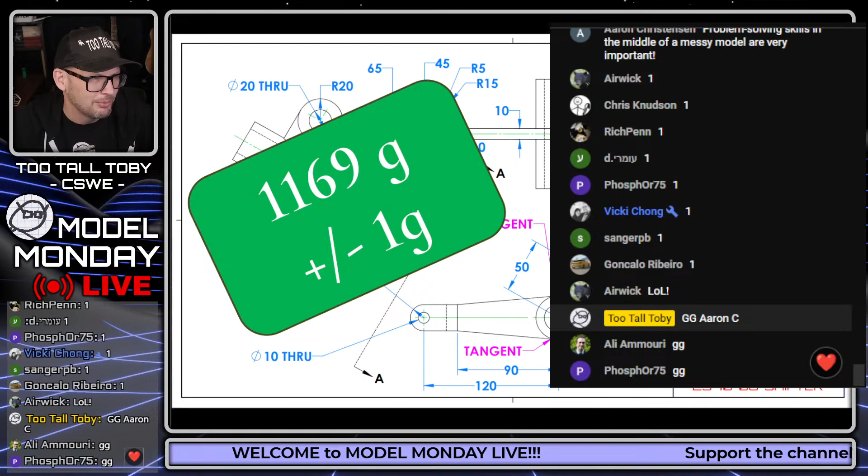It's a fun little model, a good one to practice on. These are also good if you're ever trying to learn a new CAD system. You could pull up some of these models and try to use them to learn a new CAD system.

And that's going to bring us to the end. Congratulations to Aaron C. for the clean sweep, very nicely done today.